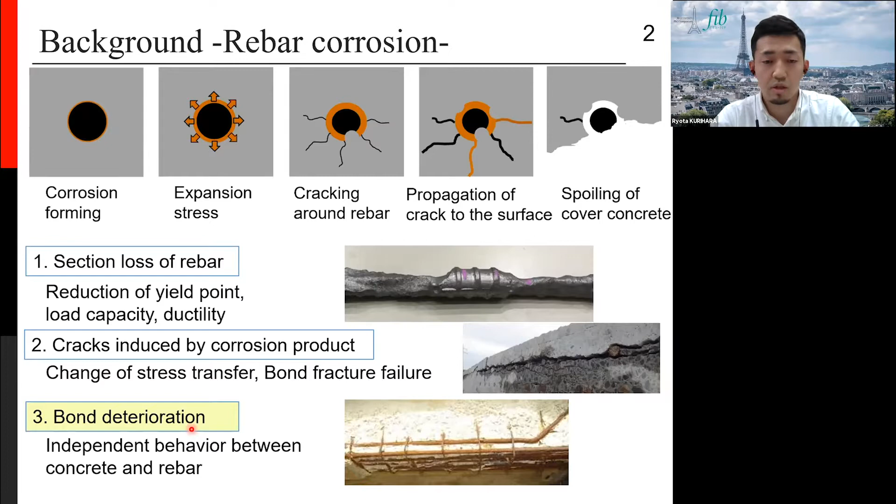Let me organize the components of bond into three factors: mechanical resistance, friction, and chemical adhesion. Among these factors, the mechanical one, by interlocking between the lug of rebar and concrete, is dominant. So for achieving sound bond, deformed bar is used widely.

Friction is the shear force between rebar and concrete, and it is considered that the corrosion product gel around the rebar surface is lost due to rebar corrosion. Chemical adhesion is generated by the cement, but it is lost immediately by rebar corrosion.

The mechanical bond is led by interlock between lugs and concrete. Rebar corrosion changes the rebar surface shape, but interlock has the possibility to be kept. In general, it is said that rebar corrosion causes bond loss.

However, that is just an overall image including these three phenomena, so considerations focusing on each component of bond were few. This study focused on the dominant factor, the interlock effect, aiming to investigate the influence of interlock condition change on structural performance of RC members, from experimental and analytical approaches.

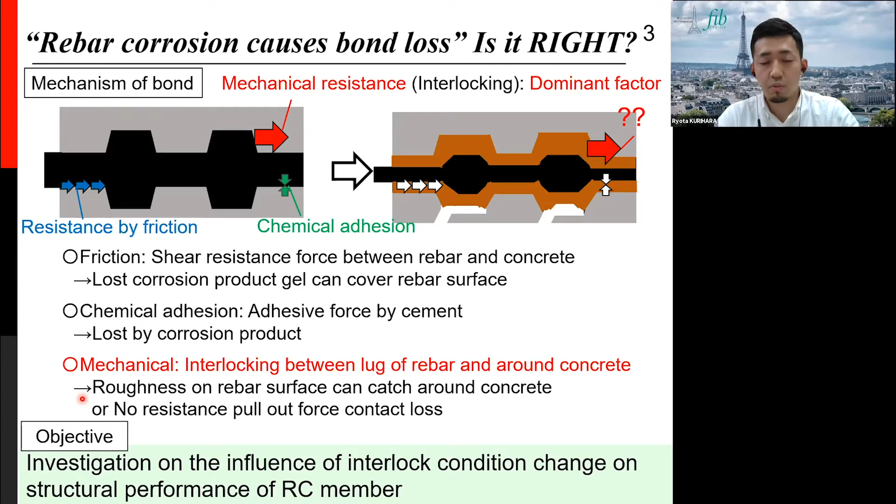To achieve 50% interlocking area, this beam did not have cover concrete from the casting, meaning the bottom half surface of the main rebars was exposed, like this picture, and this area did not have contact with concrete. In the 0% interlocking beam, a round bar was used as the main rebar, so it had only bond effect by chemical adhesion and friction action. All beams were designed to fail in shear to capture bond performance.

In general, bond deterioration causes stiffness reduction, dispersion of cracks, or an increase of shear capacity due to tie formation.

The stiffness of the 0% case was greatly lower than the sound case after cracking, and more rigidity decline occurred due to slip between rebars and concrete from 140 kilonewtons. The number of cracks was lower than other cases, and the failure mode changed to anchorage zone failure from shear failure seen in other cases.

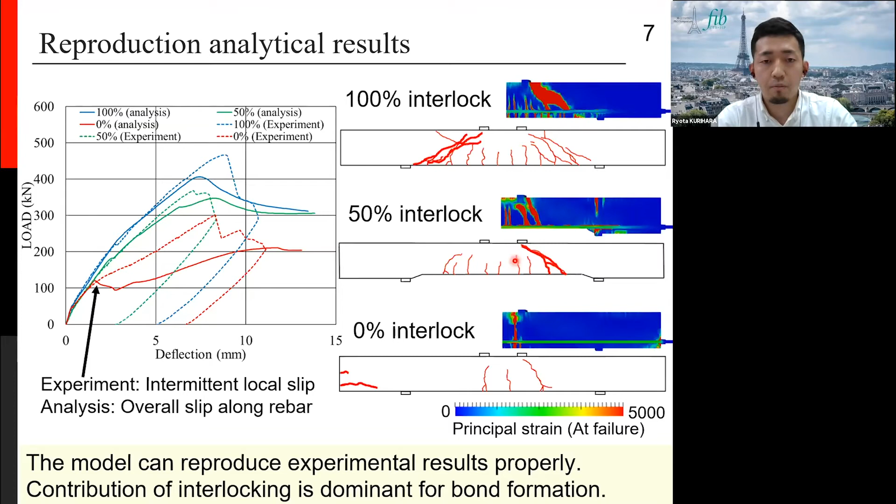It means that the contribution of interlocking is dominant among the three components of bond. To investigate conditions closer to the actual case, three viewpoints were considered: the lug loss location, the reduction of lug height, and the non-uniform lug loss in the axial direction.

Case one supports the corrosion process. Rebar corrosion is caused by the penetration of deterioration factors from the concrete surface. Therefore, rebar corrosion starts and progresses from the rebar area crossing to the concrete surface. In this study, the ultimate case, where part of the area was perfectly corroded into a round shape and the other area retained a sound lug, was analyzed.

Case 3 focused on non-uniform corrosion in the axial direction, analyzing cases where complete lug loss and sound areas existed alternately, with intermediate lengths of 3.5 centimeters and 9 centimeters set.

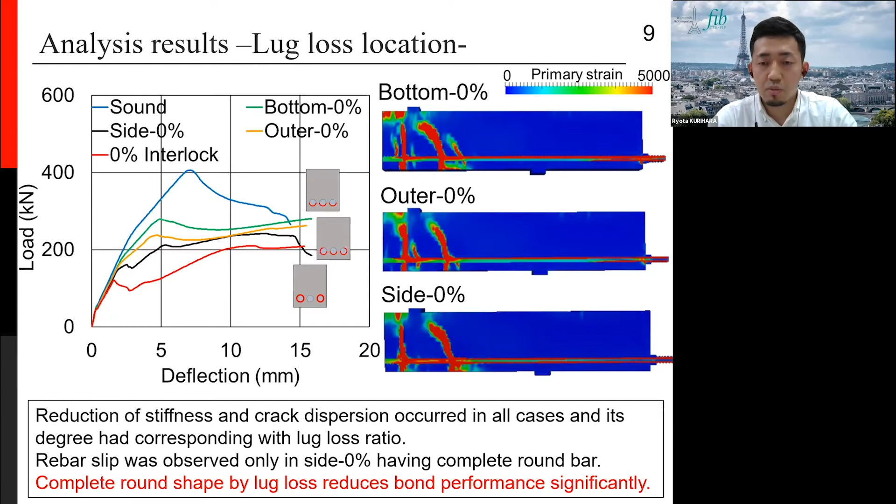The load dropping by rebar slip was observed only in the side 0% case, which has two complete round parts. So it can be said that complete lug loss reduces bond performance significantly, but rebar slip can be prevented if sound interlock remains in part of the rebar surface in each rebar.

Next, let's focus on the reduction of lug height. The green and orange lines, cases with 75% and 50% of lug height, show almost the same behavior as the sound beam in the load deflection curve and the strain distribution.

On the other hand, in the case of 25% of lug height, a clear declination and crack dispersion, and uniform rebar strain distribution, were clearly observed. So the bond was deteriorated significantly, although clear rebar slip was not observed in this case.

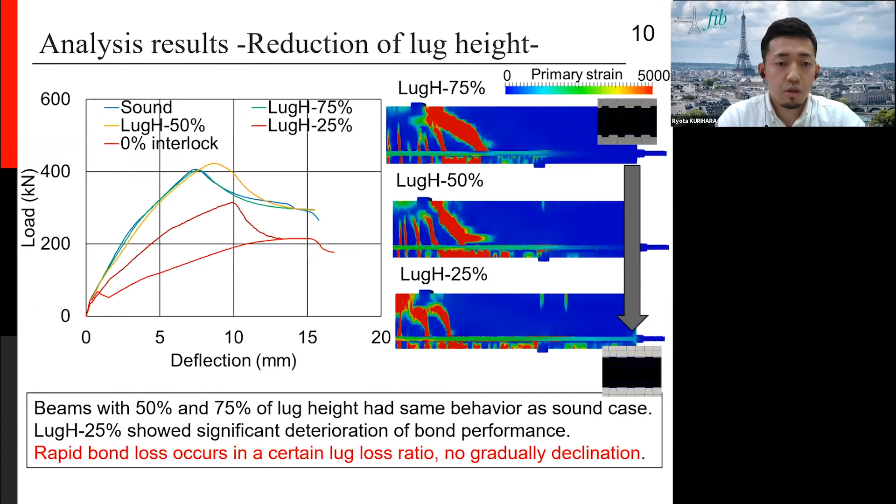The compressive strength of the beams is about 40 megapascal, and the tensile strength is 3.9 megapascal. The concrete cover means the concrete at the bottom part, under the main rebar. So in general, it doesn't contribute to the structural performance.

Thank you. I have one question regarding page 5: can you tell us more about the adhesion law between the rebar and the concrete? Can you detail the bond state considered between rebar and concrete?

In the 0% case, a round rebar is used as the main rebar, with no treatment for the rebar surface, so chemical and friction action exist, I think. In the 50% and 100% cases, the same deformed bar was used, so the difference is only the contact area between rebar and concrete.

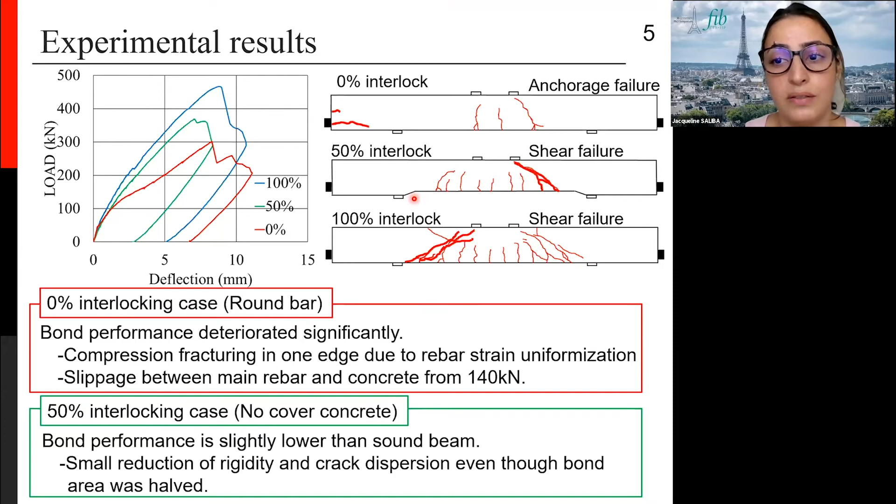Yes, the 20% is just a very theoretical corrosion ratio, meaning that if the corrosion section loss ratio is higher than 20%, the diameter including lugs becomes lower than the diameter of the non-lug area of rebar, according to the standard. But in actual conditions, the corrosion product can expand the concrete, so the space in this area will be expanded. So maybe at a lower corrosion ratio, this situation can already be achieved, I think.

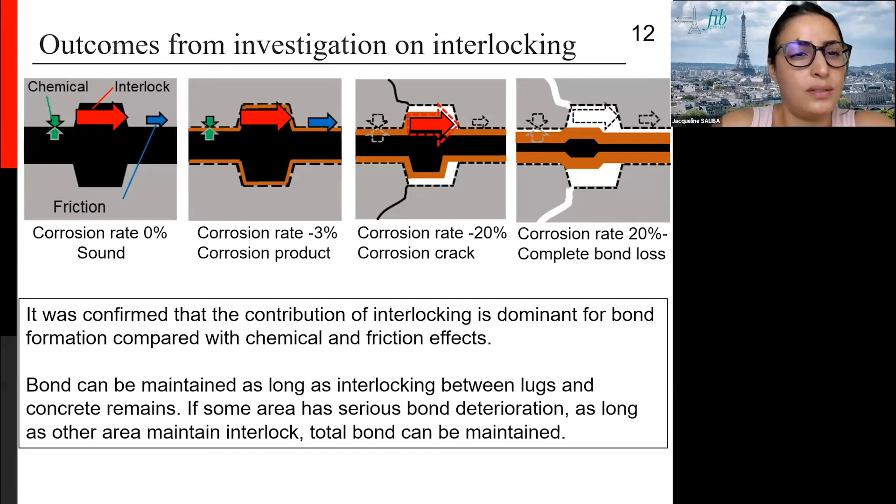Yes, so basically the gravel element behavior is based on concrete behavior, but the specific gravel behavior has no tension stiffening, or very low tension stiffening. For the strength, the compression strength, tensile strength and Young's modulus are based on the catalog spec from the factory.

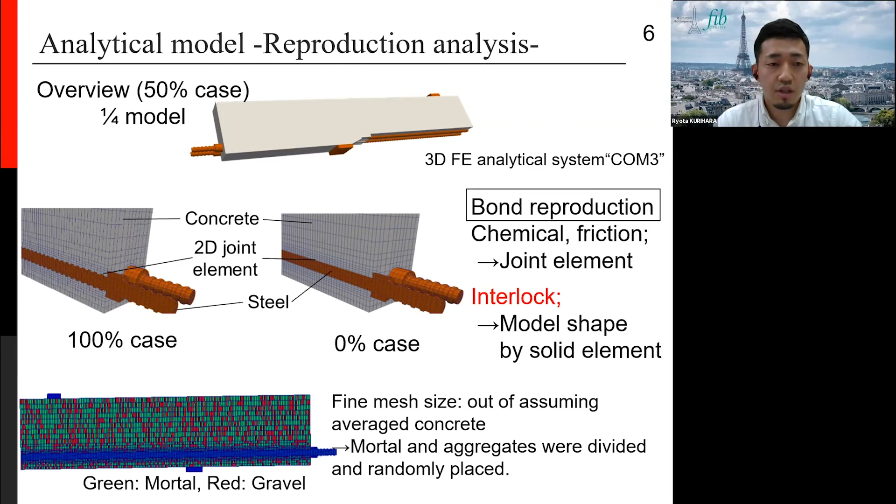So I selected to remove the cover concrete, and to achieve this situation, I set in analysis this case. Almost same condition, but the difference is the cover concrete is exist or not. Of course, experimental and analytical approach is different.

Okay, thanks. And I have an additional question, if you're okay. Did you study, even numerically, the influence of the result for the rebar diameter, or is it covered with the lug analysis that you've done?

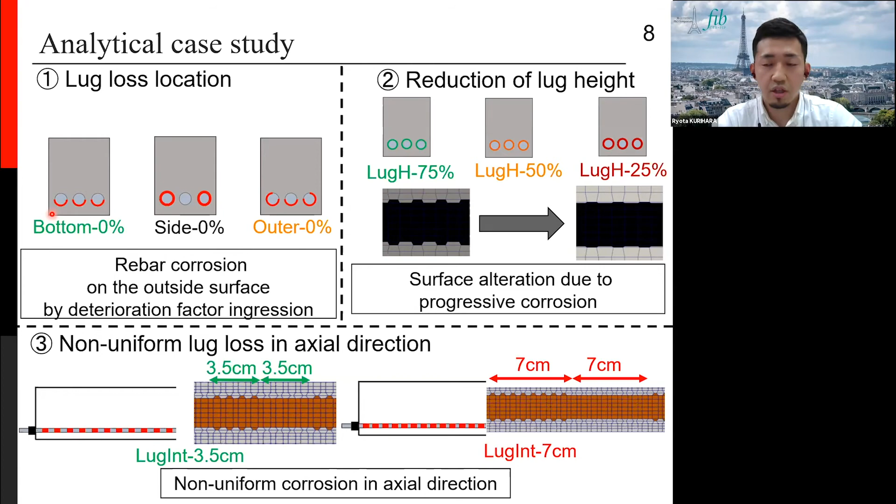For the influence of the rebar diameter, I don't conduct for the beam analysis, but for simple analysis, the tensile test and reproducing analysis is conducted like this. I conducted the experiment and both experiment and analysis, and as one parameter, I set the rebar diameter, and of course from lower the rebar diameter, the lug height is lower, but the trend is almost same.

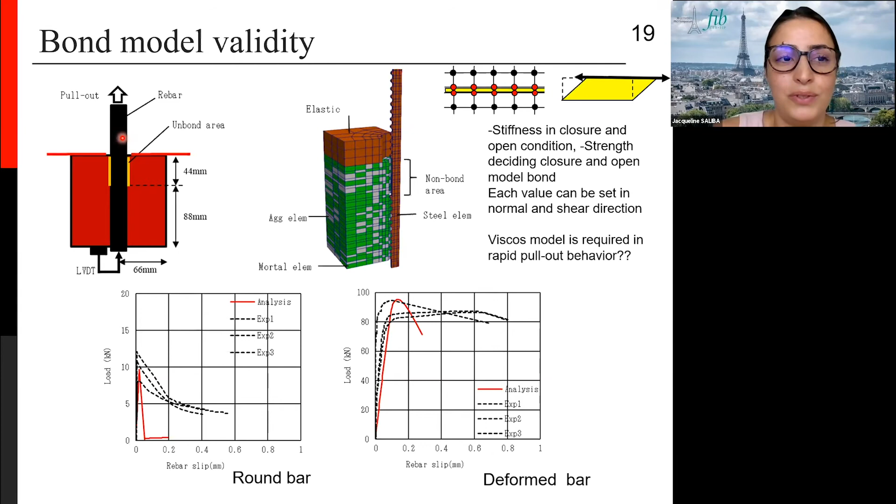Yes, it's a matter of understanding. In the test that you have presented, when you talk about 50% loss, I don't understand exactly if you are talking about 50% loss of the lug height, or in my opinion, it's more an effect of spalling. And I'm not sure that this is exactly the same as the effect of lug height.

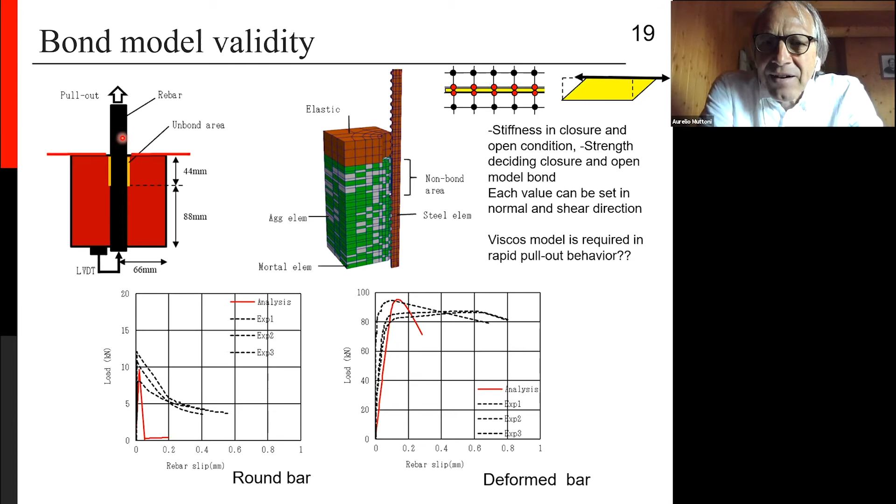Yes. So because it's more or less the same as when you remove the cover, and then the bond strength is very much related to the confinement effect of the stirrups. And this is not the same as the loss of the lugs, in my understanding, but perhaps I don't understand exactly.

Yes, so the first effect is the spalling of the cover concrete. In this case, the cover concrete is removed from casting, so the effect is only to the low cross section. So the initial stiffness is lower in this graph. It is difficult to catch, but the initial stiffness is a little bit small.

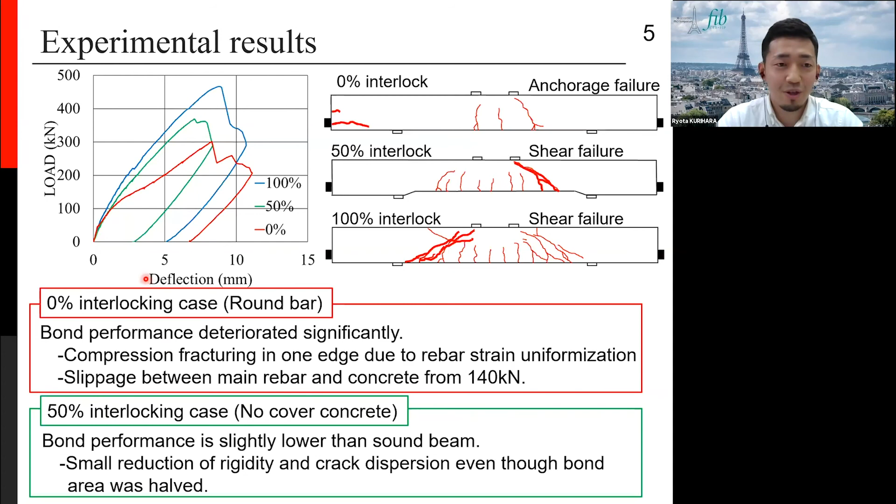And I also conducted this beam with same geometry, but there is no stirrups case. So in this case, the stirrups kept the main rebar to keep main rebar contact in upper area, but if there is no stirrups in the middle stage of loading, the main rebar can move, and then you almost lose the bond strength.

Yes. So I think I fully agree, and I think one should differentiate the two cases. And in my opinion, the 50%, what you describe here as 50% interlock, is more the effect of spalling, and is perhaps not so much related to loss of lugs.

And with respect to the effect of loss of lugs, in my opinion, this phenomenon is very much related to another phenomenon, which is the development of longitudinal cracks along the reinforcement bars. I don't know whether you investigated this phenomenon. There are models, there are even mechanical models describing the effect of longitudinal cracks. And if you have a longitudinal crack along the bar, then you lose partially the contact between the lugs and concrete, which means that you will have reduced bond strength.